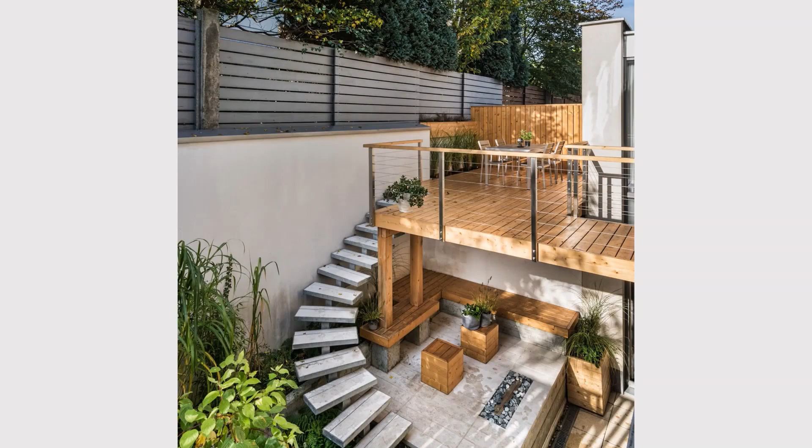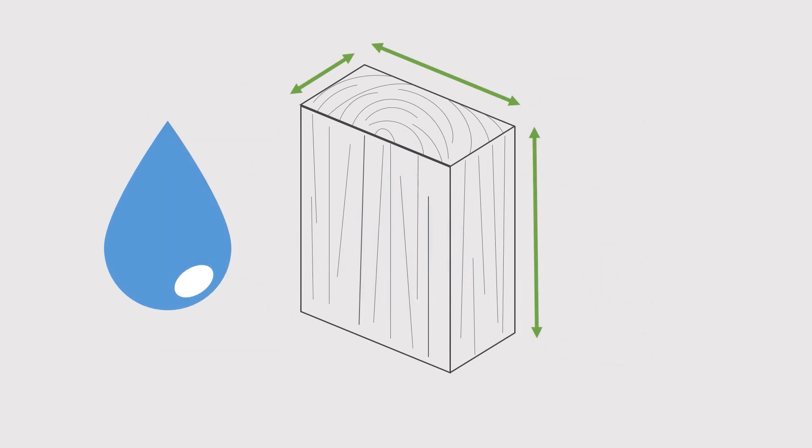Exterior wooden structures like cladding, posts, trim, balcony guards, stairs, and decks encounter moisture by being exposed to rain, snow, humidity, and groundwater. Wood swells when it absorbs water and shrinks when it loses moisture. When combined with oxygen, this creates perfect conditions for the growth of staining and damaging microorganisms such as bacteria, fungi,

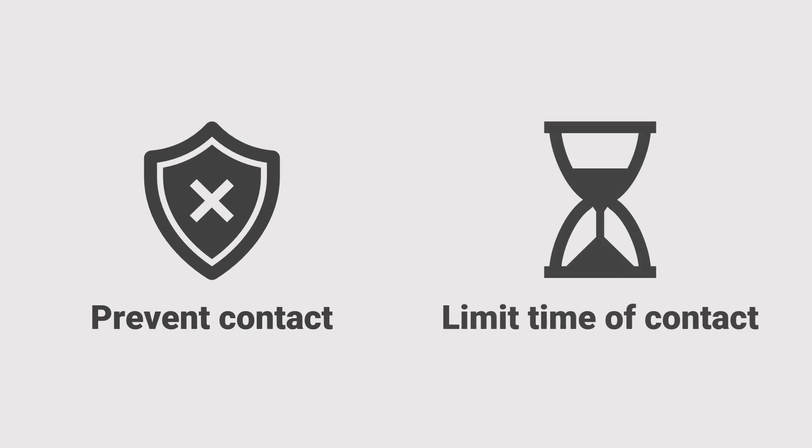and insects. The best way to protect a building is to limit the wood's exposure to moisture by following two principles. Keep the water away from the structure, and if that is not possible, limit the amount of time that water stays in contact with the wood. The most important step is to protect the wood from getting wet in the first place.

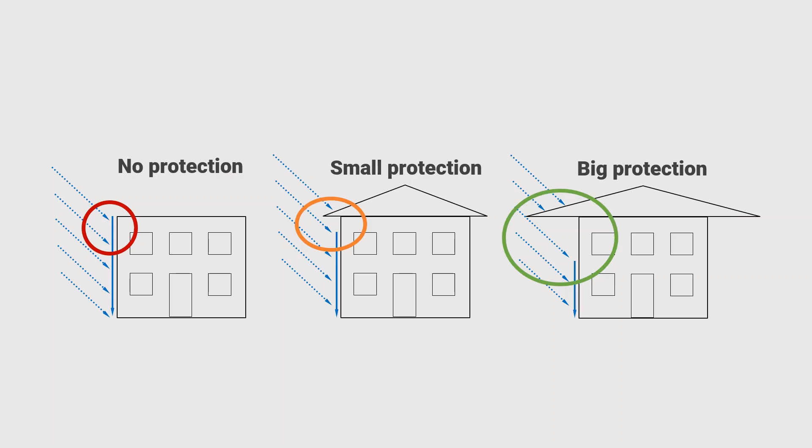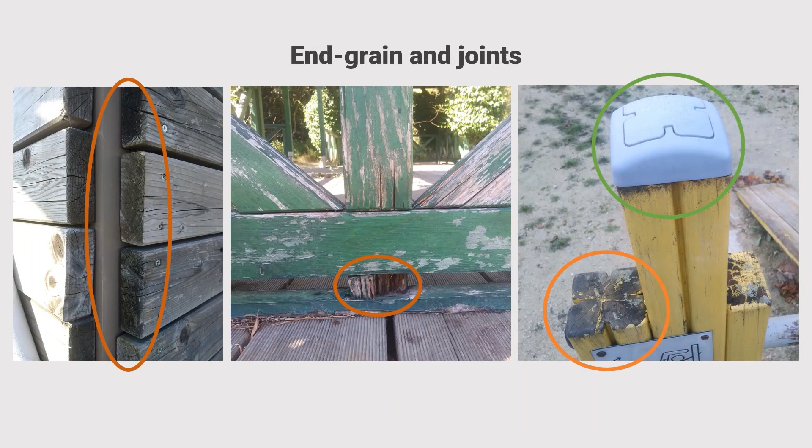The most obvious way to do this is to use large, protruding building elements that act as a physical barrier against wind-driven rain, like large roof overhangs, canopies, cantilevers, metal caps, or any other kind of cover, which is especially important for decay-prone wooden areas such as end grain and joints.

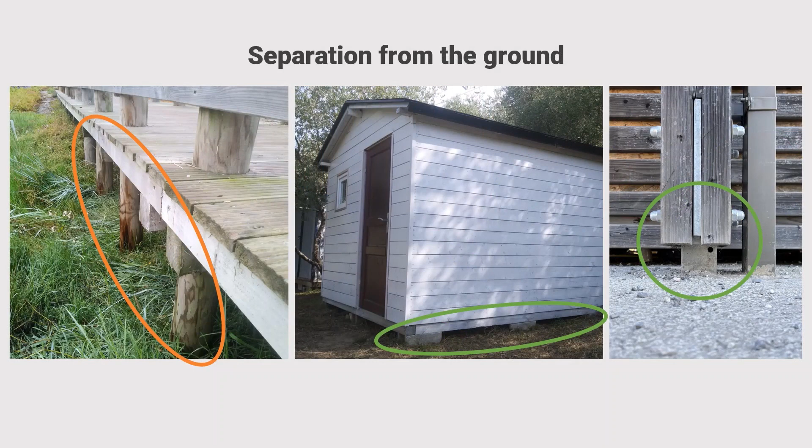Rain splashing up from the ground can also be easily avoided by adding splash protection like plinth or rims with pebbles. Exposure to ground moisture can be limited by mounting timber elements on concrete piers or metal anchors instead of allowing them direct contact with the soil.

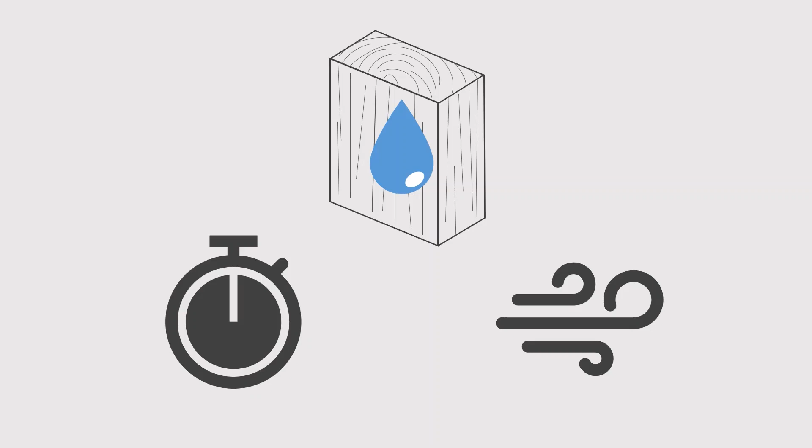When water exposure cannot be avoided, water needs to be released or drained from the structure as quickly as possible, and good ventilation should be ensured so that the material can dry quickly. An example is designing connections in a way that prevents water from being trapped, avoiding so-called water traps.

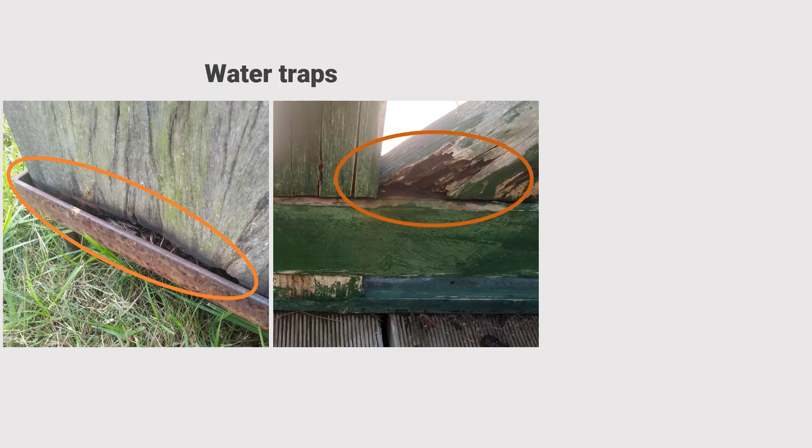Because untreated lumber end grains absorb more moisture than any other part of a wooden board, beam ends should not be placed in direct contact with walls or another piece of lumber, as this will prevent it from drying. Instead, they should be separated to allow better ventilation and quicker drying of wood.

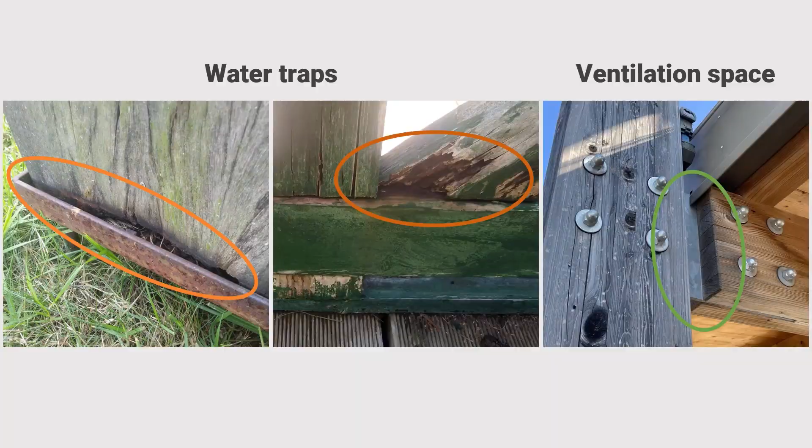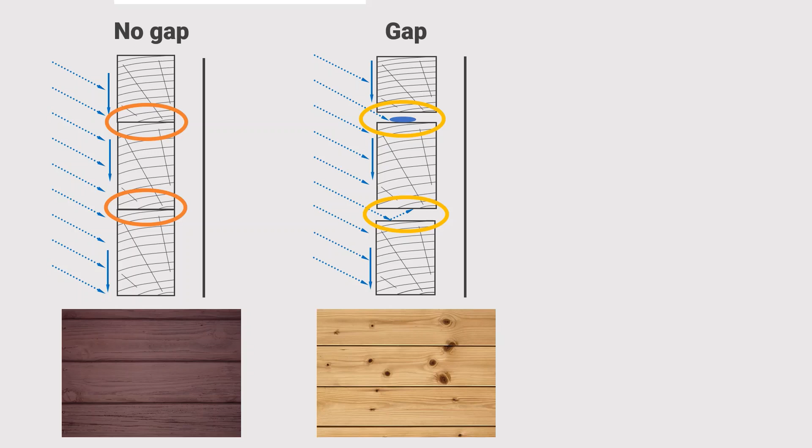Next, 3 to 7 millimeter gaps between adjacent horizontal or vertical wooden boards allow the wood to swell and shrink without cracking and enable better water drainage and air circulation. An even better solution is to add a slope to horizontal wood surfaces that will help the water leave even faster. Vertical cladding can also reduce the possibility of wood rot and is easier to maintain than horizontally placed boards.

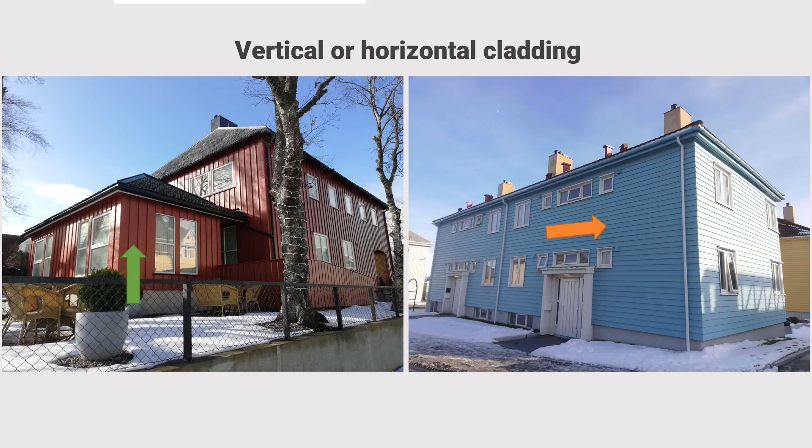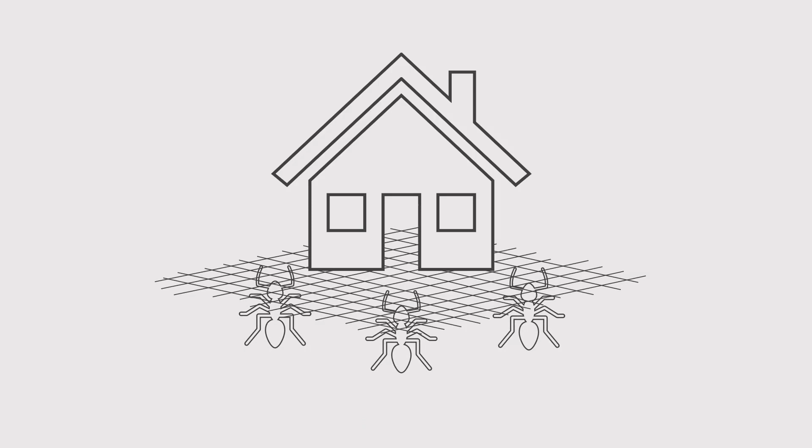Since insects require water and look for humid environments, protective design measures against moisture are also effective against insects. However, it is advisable to also apply chemical biocides and physical barriers beneath and around the perimeter of the structure to prevent penetration by foraging termites. The structure should be designed in a way that enables easy inspection of areas prone to infestation.

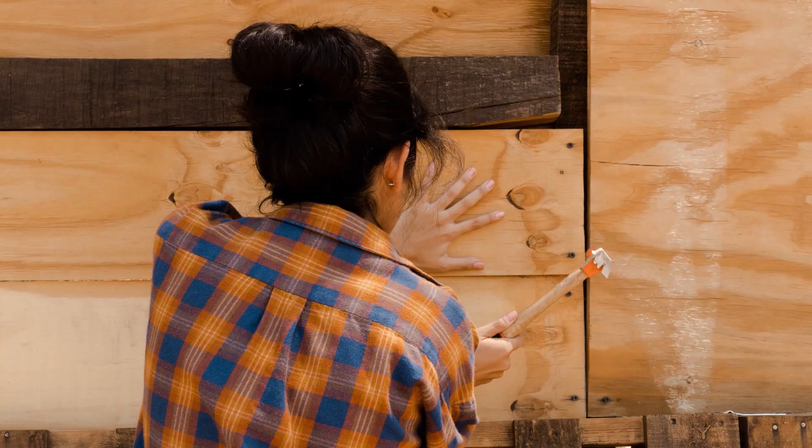Last but not least, all engineered facade solutions should be designed to allow for easy maintenance and consist of individual elements that can be disassembled and replaced without damaging the other structural elements.